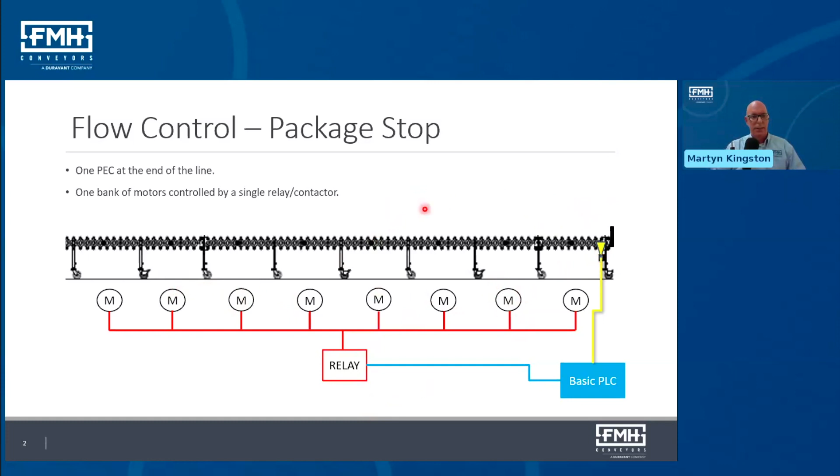We have a very simple setup. We have a very basic PLC, we commonly use a Siemens Logo. We have some sort of sensor at the end, and one relay or motor contactor just to turn all the motors on and off, and they all turn on and off at the same time. Obviously you can get issues with inrush current, that sort of thing, turning all those motors on and off. That's one of the disadvantages, but this is a very simple flow control.

So our packages will come trundling down the flex. When the first package hits the sensor, there's a small time delay normally between hitting the sensor and the motors turning off, but we essentially turn all the motors off at the same time. If somebody's there, they take the package off and the motors can restart. That's pretty much it - that happens over and over again until the conveyor is empty.

We're normally building a time delay on the relay that prevents chatter on the contactors. So we have a small time delay for stopping and a small time delay for restarting. This also allows you, if you have a queue of boxes along here, to get that box off without another 50 boxes trying to push you over - so you take away that line pressure.

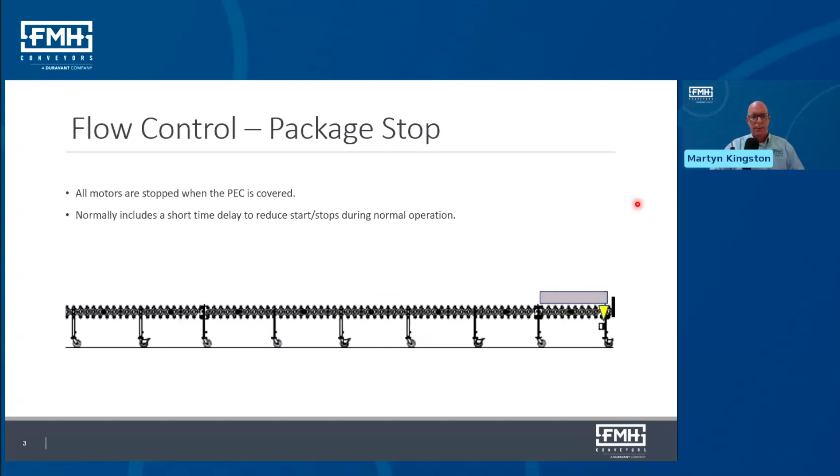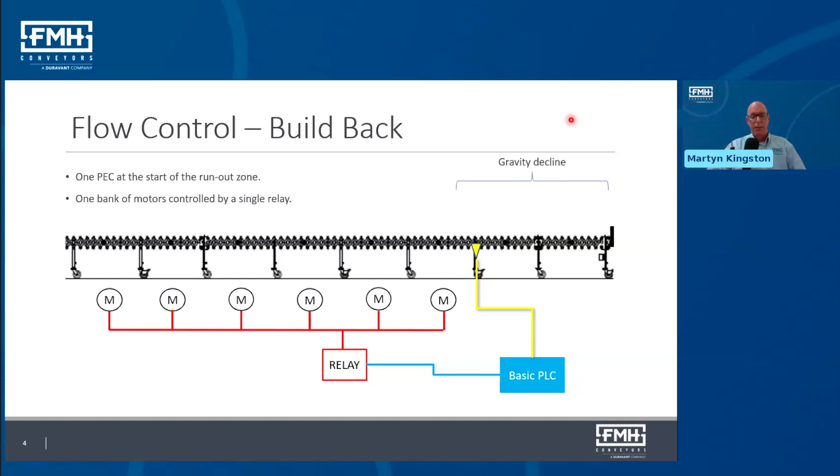So next we have what we call build back. I've actually drawn a gravity decline - I'm using the same drawing, but use your imagination that this is running downhill. So we have the same kind of setup as we do with a package stop - only one sensor, one relay, one basic PLC. But now the photocell is back from the end a little bit.

So what we can see here is the package building up, and eventually that photocell is covered. Again, we're building in a time delay - I don't want it stopping every time a box passes over it, so we have to build in a time delay based on speed. Also we need to make sure - this is a common error - the photocell must be in the gravity decline part. Otherwise the system won't restart by itself, and after that time delay, the motors stop.

But if you don't put the sensor in the right place, when you get that restart, it won't become uncovered, so it has to go in the gravity decline. When that restart happens, the motors start up again and it all carries on. Because you've got that time delay in there, if you've got someone there constantly emptying that section, then the motors don't stop at all.

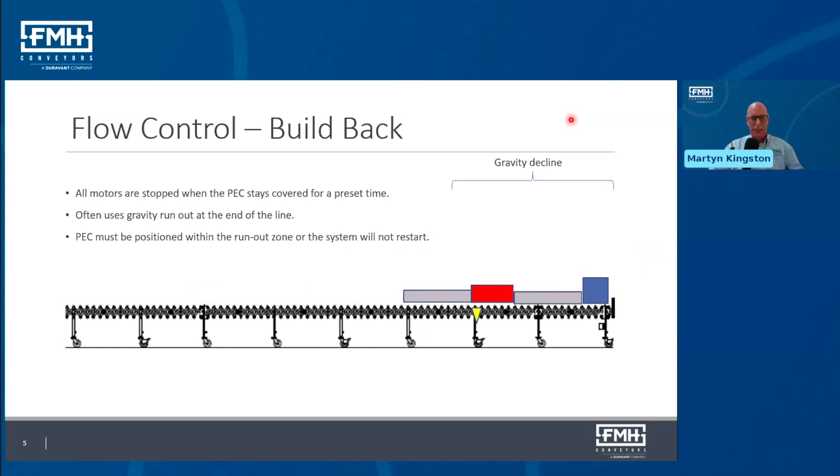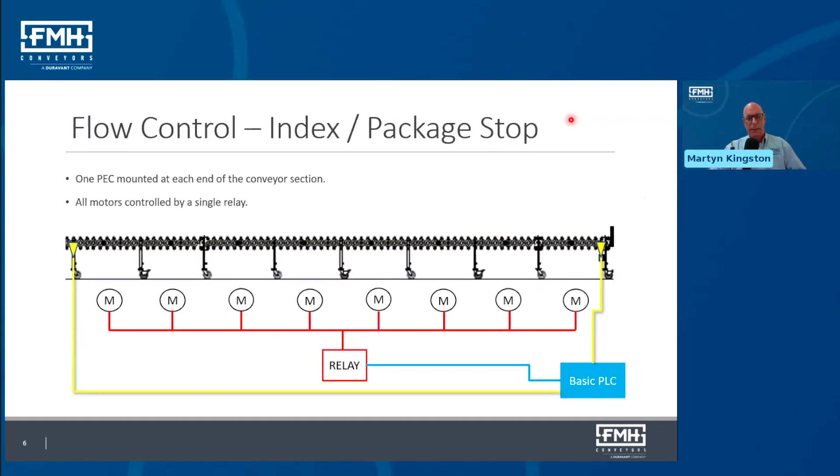So indexing - this is getting a little more interesting, and the applications are a little more interesting. Now we have two sensors, one at each end of the conveyor. All the motors are controlled by one relay, all starting and stopping at the same time, so the same negatives that you might have there.

Indexing is when the start sensor initiates the motors to move. So when it's in index mode, all the motors are off. The first box comes in and starts the motors off, and when it sees the tail end of the box, the motors then stop. One of the advantages here is you get a constant gap between parcels independent of the parcel size. So what you get is what I'd refer to as a maximum fill rate - if you've got two small parcels and one big parcel, you're getting the most amount of parcels onto your conveyor at one time.

So when we switch to a package stop mode, all the parcels move to the end sensor, and then we can start removing them. Let me back up a bit.

Just to say, when both of those sensors are full, then we get a full signal. Now that can be a light or a flashing button or an audible alarm, but it will show that the whole thing is full. It could also be an output to a system, SCADA system or something like that.

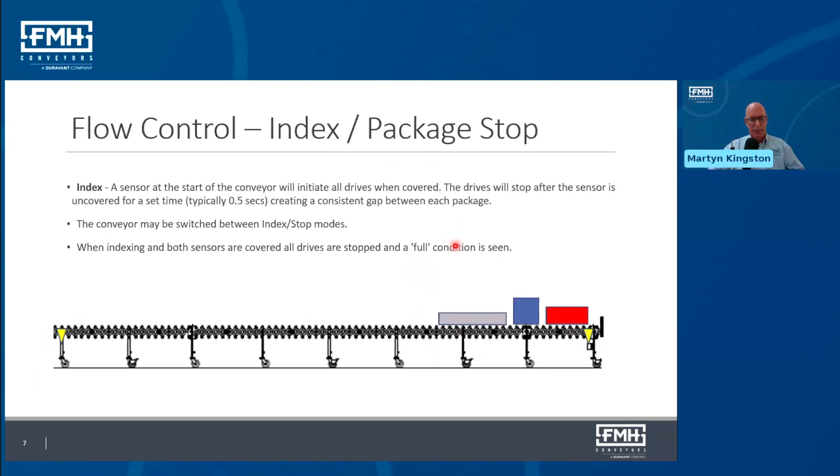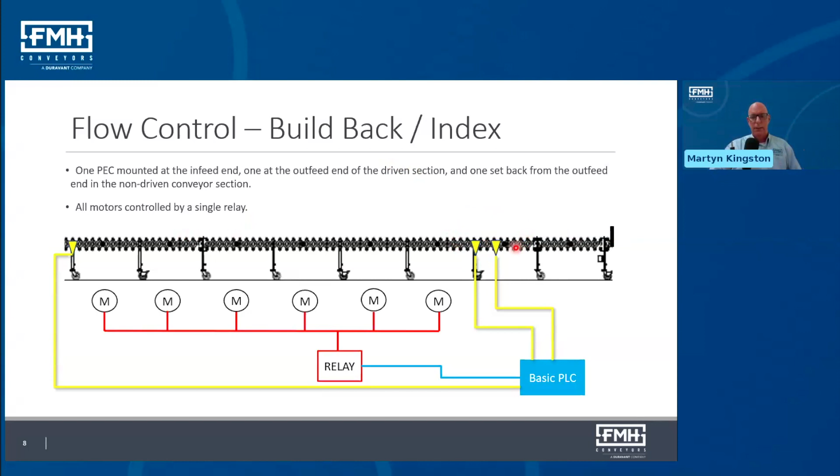So now we're combining two different systems that we've talked about already. We have 3 photocells. We have the indexing system, which we've just seen, and that's combined with a build-back sensor. So essentially, we don't do anything until that build-back sensor is activated.

We're just in normal running mode. So all the parcels will run down, conveyors running normally. Now, when that last section is full, nobody's there to empty it, or there's some sort of build back there, then we tell the rest of the conveyor to switch into index mode, start accumulating. There's nobody here to take the parcels off.

So that's when we start to index. So then we can fill up that whole indexing section while this guy is on a break, or sorting out some parcels in the truck, or he's dropped a box of wine or something. So, whatever that problem is.

As soon as that's taken off, the build-back sensor becomes uncovered, and it automatically switches from index mode, and all the parcels move down as normal again.

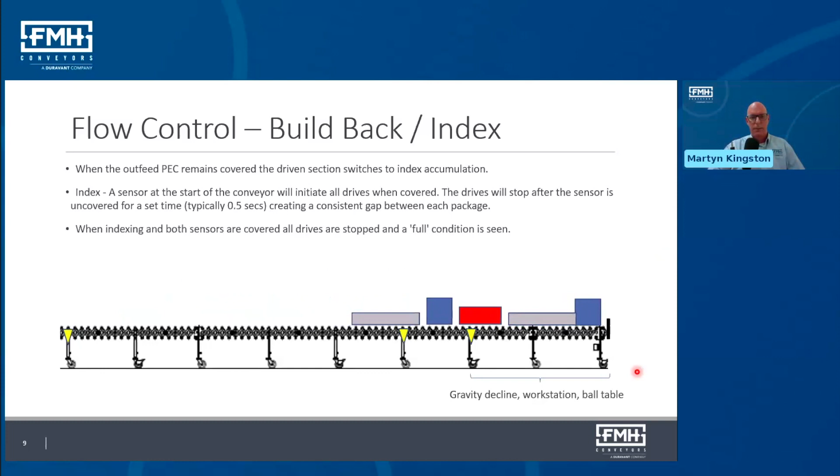So we're expanding on that same idea, but we're adding indexing sections. We're kind of splitting a longer conveyor into zones. So we have a number of index zones, each controlled by a separate relay. And the trigger to tell these zones to index is that build-back zone.

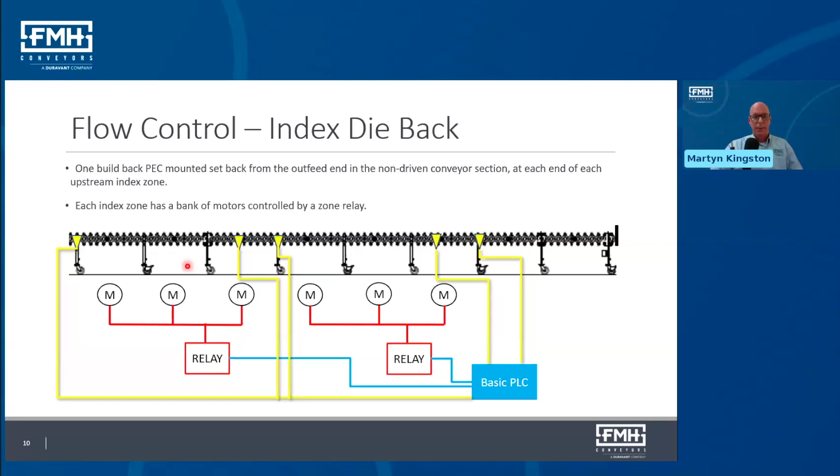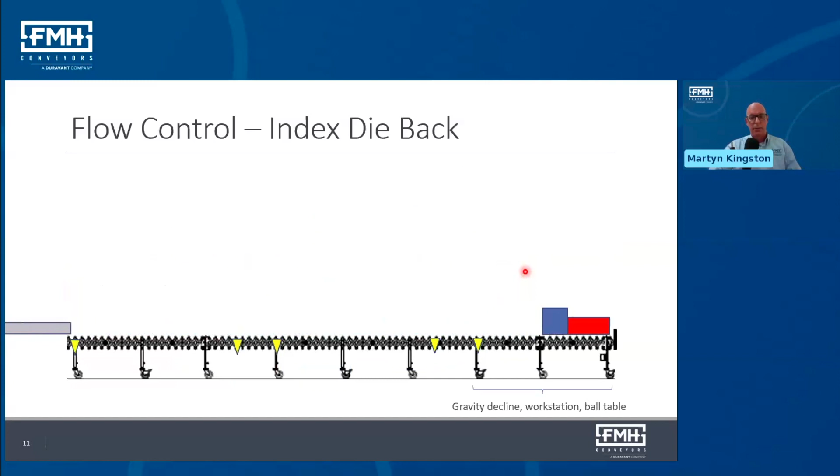We've done systems of this where we have an operation at the end of a long conveyor line, something like a weigh scale or a packing line or a scan. And if that person can't keep up with the flow, if it's normal, the input and the output are balanced, then the conveyor just runs as normal, no start stops, none of the disadvantages that come with that.

When it fills up and the person can't keep up with their work, or they've met a problem, or they've had to leave, then the immediate zone upstream starts to go into index mode. And then we start to fill up.

Now, the rest of the zones, however many there are, they're all just running normally. They're not starting and stopping. It's only this one. When this one's full, i.e. both of the sensors are covered, then this next zone upstream starts to accumulate.

And as soon as this zone becomes uncovered, then everything goes back into normal running mode. We don't need to accumulate anymore. The problem's gone away. The person's back at their station.

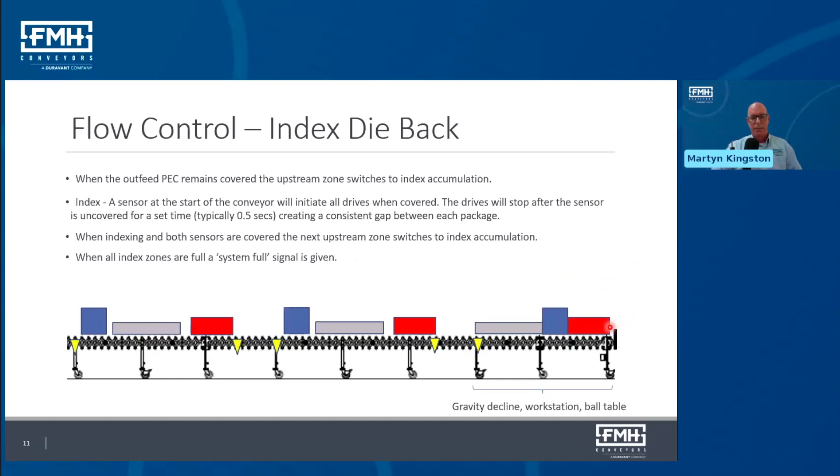Next up, we've got increasing complexity all the way through. You can see now we've got multiple relays, multiple motors. We've got one central PLC. That's normally the architecture we see on a flex.

Obviously, there are other things we can do on fixed conveyor. There's 24-volt technology where we use separate control cards with separate 24-volt motors. You might end up with one card controlling 2 or 4 zones, but in this case, we're using our normal DC motors and they've got an onboard relay.

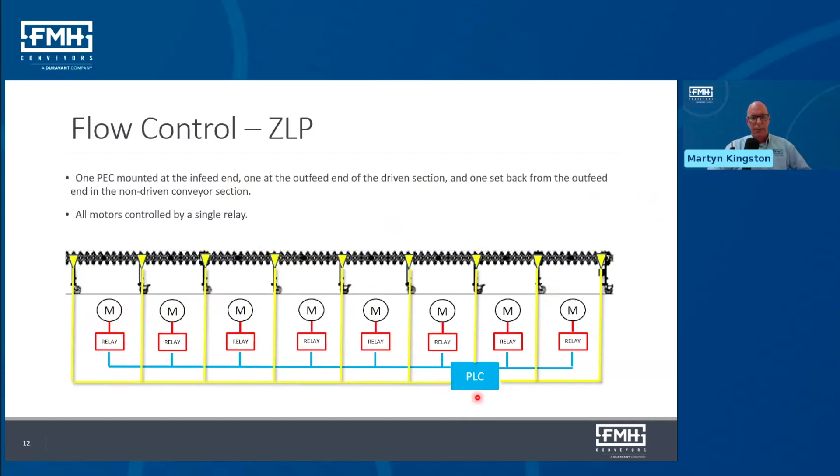So the PLC receives all the information from the photocells and then tells the relays when to turn on and off. Normally, we're stepping up from a Siemens logo here up to something a bit more substantial, probably a 1200 series PLC.

So singulation release. This is always one that's difficult to explain. The difference between singulation and train release. I'll have to admit, I've been at this for about 30 years, trying to explain this one from the early days when I worked with Interroll and we were developing the 24-volt technology. There were 2 versions of release, and trying to explain the differences is a difficult thing. Hence the animation. Hopefully, this will make it easier.

Essentially, what you get is the parcel runs through, it stops at the sensor with the leading edge. The system doesn't care about the size of the parcel as long as it's not bigger than the zone. Otherwise, you'll be covering both sensors and you end up with a stop situation that can't be released.

In this case, with singulation release, the first parcel is taken off, and then each parcel shuffles down. Essentially, each zone only looks forward to the zone in front. It can't see any further than that.

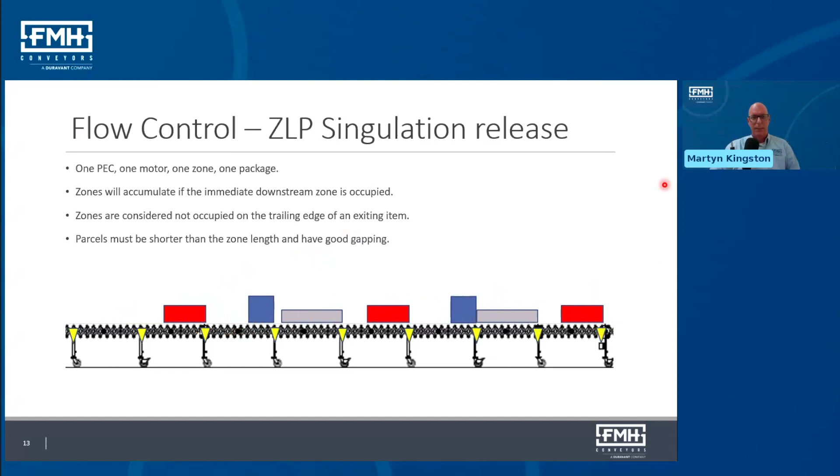If we look at train release, it starts off the same, it's got the same architecture, the same parts, but the release is different. The restart is different. So in this case, when that first parcel is taken off, everything moves together. Hence the name train. Everything moves just like a train does.

Now, the disadvantage of this one, you do get a big inrush current again because you're turning all your motors on and off at the same time. So that could be an issue. And inertia. You can see here that it's a flex on wheels. If you don't have all the brakes on and you've got a lot of inertia on top of the conveyor, it could be that when you get that big restart, the conveyor goes one way and the parcels go the other way.

That can also be an issue on fixed conveyors where the legs start to flex because of the inertia at restart. So sometimes you do train release and then break the zones up a little bit, or you build in some sort of time delay on the motors so that you don't get all the motors starting at once.

It's worth noting, if we're talking about throughput, the train release is twice the speed of singulation release. So all of them are sort of dependent on the size of the parcel, the size of the zone. It's not really conveyor speed that makes the difference, it's the speed at which they're moving downstream. And train release is twice the speed of singulation release.

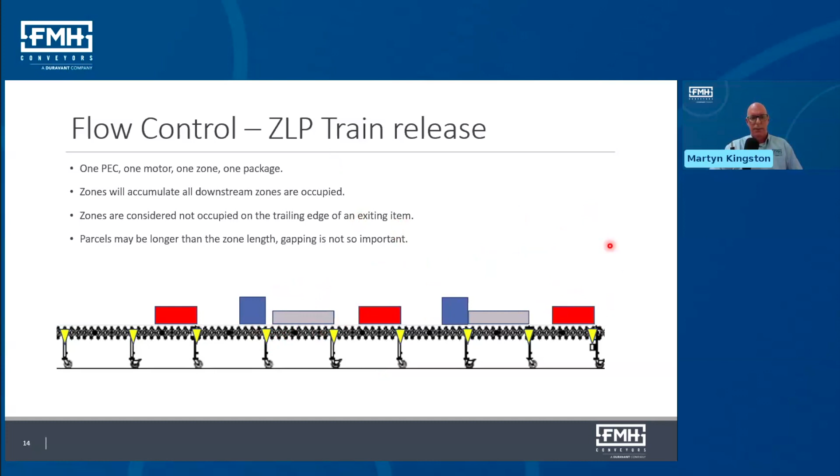So next thing, very simple this time. We've got one sensor. We're talking about jam detection. Typically, it's at jam points, around merges, anywhere you've got a 90-degree, slides, those sorts of things, you would get a jam detection. We don't commonly use it on a flex, but it is possible.

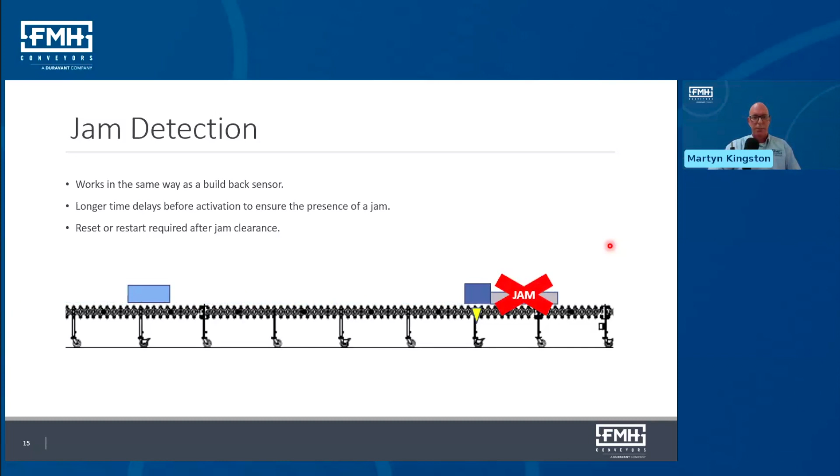So a parcel gets jammed, maybe it's jammed between side guides, it's too big, something's happened, a piece of strapping on it or something. Then the next parcel comes into the jammed one and the sensor stays covered.

Normally, we're looking at a much longer time than you would see on something like a build-back sensor. We've done projects in the past where it's anywhere between 10 seconds and 45 seconds. Obviously, the 45 seconds, that's fairly long, that's a long time to see whatever damage might be caused by that jam. So you have to kind of balance it between not stopping too often and the damage that may be caused.

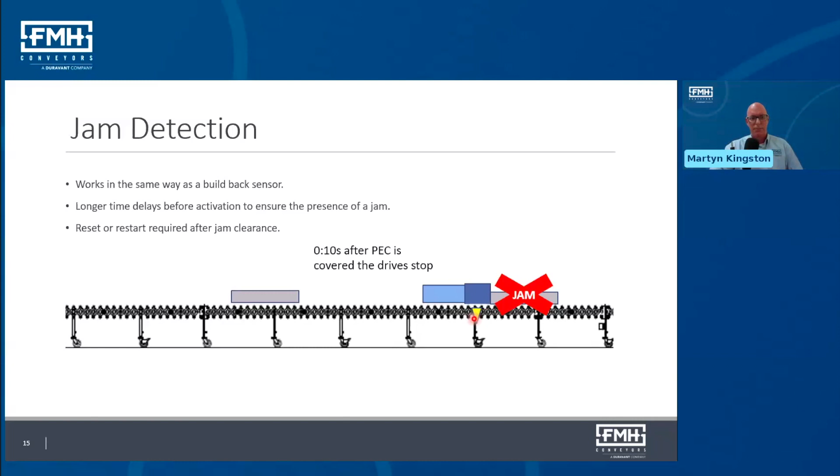Normally, we clear the jam and then hit a reset button, and that kind of restarts everything.

One last part, obviously we saw a lot of sensors in the presentation so far. We have to match the sensor to the application and to the product. The material to be handled for us is normally cartons and poly bags, that sort of thing, so it's fairly straightforward. But we also do things like tires, plastic molded parts, it could be anything. And you really do have to pick the sensor for the right application.

The most common one for us is to use just a diffuse scan sensor, which is in a bar looking up through the rollers. Diffuse scan sensors are okay, they're pretty good. The range can vary depending on lighting conditions, that can cause some problems, but for the most part it will see the box and everything will work fine. Because we're looking up through the rollers, what we can do here is have an oversized box, so the box can be bigger than the conveyor and hang over the edges.

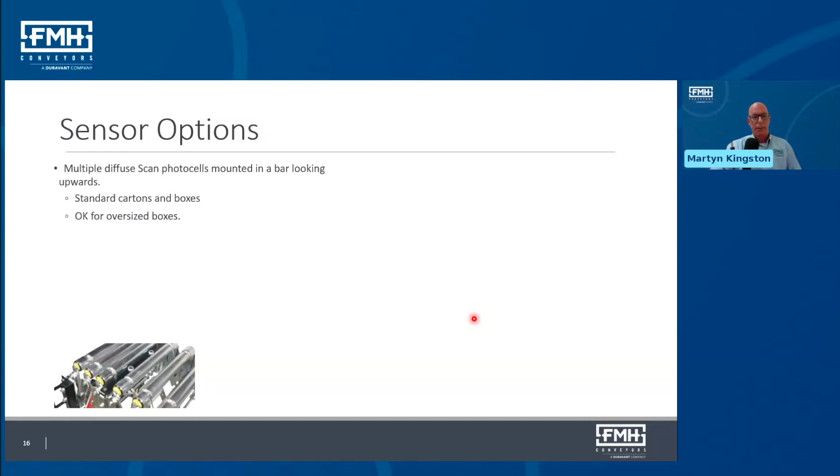So that can't be done on our next option. If we have a retroreflective sensor, so we have a sensor and a reflector, we're now breaking a beam, so you're much more likely to get a good positive signal. But now we have parts, the reflector on one side, the sensor on the other side. Now we have parts that are sticking up above the top of the roller, so the sensor position has to be wider than the biggest box, and you can't put anything wider than that. So you're creating an obstruction.

Next level up, we'll have a through beam sensor. So we have a little story from the past. We had a customer using retroreflective sensors, which was fine until they started putting a silver label on their product, and the silver label acted as a reflector. So we were getting all sorts of weird signals, and we had to go and change all of the sensors to through beam. So it really is, you've got to be careful about the application.

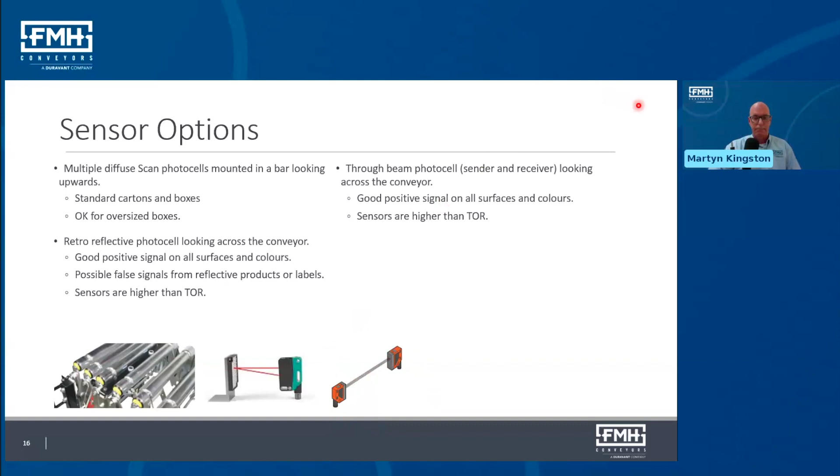Here we get a good positive signal again. One of the points about a through beam sensor is we can now be safety rated. There's a lot of changes at the moment around EN 619 and safety rating, performance level rating. This type of sensor can be rated at performance level C. You can't really go much above that with an optical sensor, but a through beam sensor can do that.

Then we're looking at arrays and light curtains. Array sensors are fantastic for irregular parcels. If you've got a box, this is probably overkill. If you're putting all sorts of parcels down, garden spades for instance, we have actually seen that happening. A garden spade, obviously, you've got a change in profile, it's a change in height. Sometimes it's on the belt, sometimes it's sitting 3 inches above the belt.

The array sensor is actually several sensors stacked one on top of the other, so you end up with a larger range of vision. You can also set array sensors so that it can ignore some products, a belt, for instance. If a belt is moving through that array, you can tell it to ignore anything that's only covering one of the lenses, that you need a 2-lens cover to take the signal. So that's quite a useful thing. Obviously, they're more expensive - you've got multiple sensors in one stack.

And if you're doing safety devices, obviously something like a light curtain is required for any higher performance levels.

If optical sensors aren't going to work for you - things like tires - we did one project in the past where we had plastic molded fuel tanks, which were black. They had multiple different textures on them. They were a very weird shape. In that case, ultrasonic sensors are fantastic.

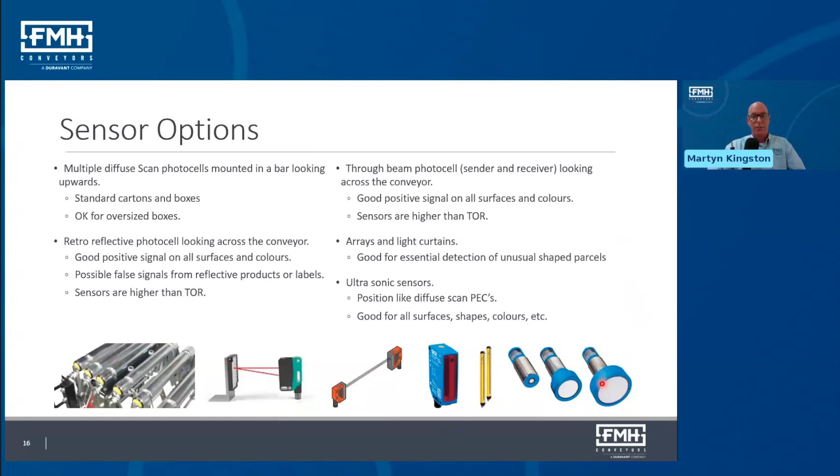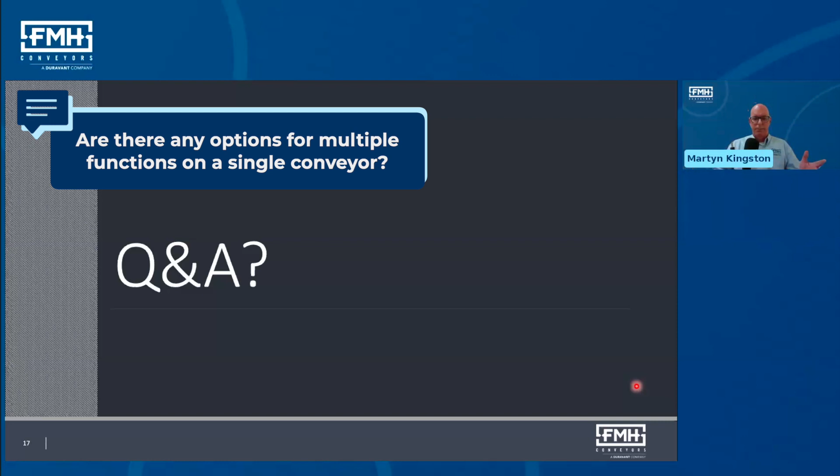So are there any options for multiple functions on a single conveyor? Yes. We launched this a year and a half ago, I think it was. So we can have a flexible conveyor with all of the functions on. It's built like a ZLP - we have all the sensors of a ZLP because that's the higher level. But you can have a selector switch that turns ZLP off if that's not suitable for the application you're doing. So you can have zero line pressure for part of the day if you need it singulating parcels, and then use it for another application another part of the day. You change the operation and now put piles of parcels on, or longer parcels that ZLP wouldn't work with. You can just have this 5-position selector switch, and that gives you an option to do anything you like for any application. So yes, that is possible within our products.

So if the conveyor has ZLP, but the operator manually moves between zones, what happens to the logic? So that's really good.

ZLP doesn't have the visibility that a human does, obviously. So if you remove a parcel, it just knows that the sensors are covered. There'll probably be some sort of time delay, and then the system will try and reset itself and everything will move forwards.

Problem happens really when you have, not with train release, but mainly with singulation release, a large parcel covering two sensors - then the system can't restart because you've got 2 zones covered. The previous one can't move forward because the zone in front's covered, and both zones will end up in a stationary condition, and it can't clear unless you have a manual intervention.

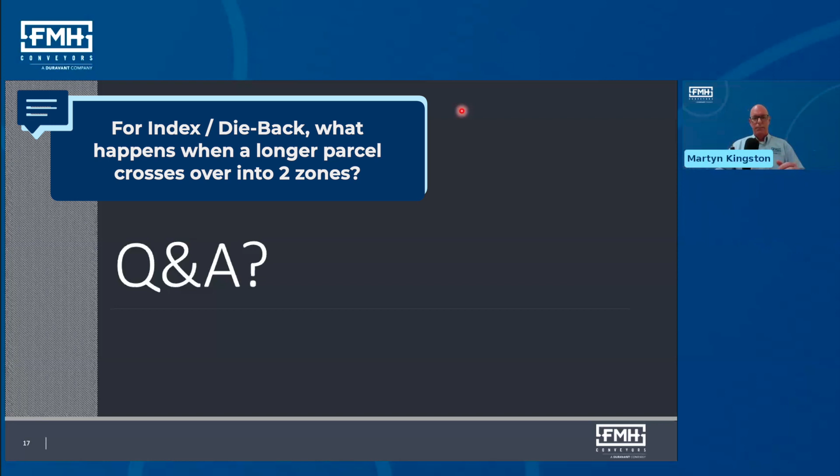So for index dieback, what happens when a longer parcel crosses over? The longer parcel for index dieback will just be seen as a series of long parcels - it could even come as a slug of parcels. But again, it only sees sensors on, sensors off. So a long parcel covering 2 sensors in a single zone will immediately trigger the upstream to start accumulating.

How does flow control make the conveyor more efficient? In a normal conveyor, that's exactly what flow control is about. In a normal conveyor, it just runs - the motors are running whether there's a parcel on it or not.

What we can build in is sleep modes. So if there are no parcels, no activity, we turn the motors off. You don't use electricity, you don't wear out the parts in the motor. So that is a really key part of flow control - you extend the life of your product.

You pay less for your electricity. We're saving the planet, one sensor at a time. That's quite a good thing to do. Yeah, I think that's probably one of the main reasons for doing that.

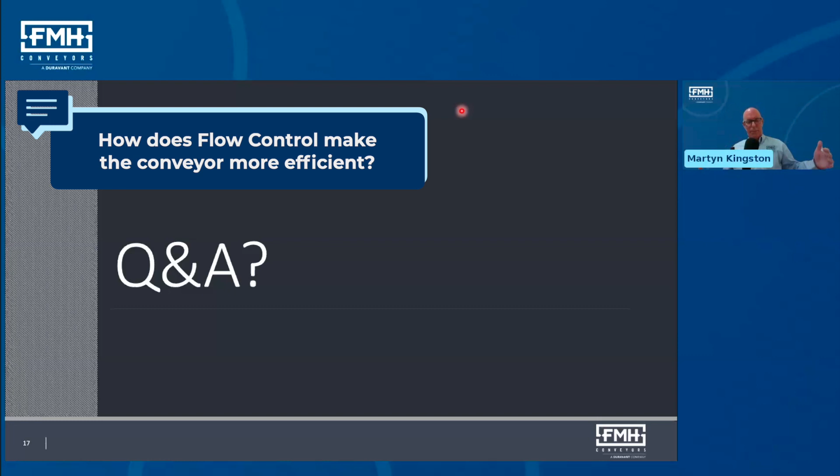Obviously, it's better for usage as well. If you've got nice flow control, you're not just getting parcels falling off all over the floor. Each parcel's presented one at a time. It's a much safer way to work.

So how many sensors are on a standard sensor bar? That really depends on width. Within our Flex product, if we have the diffuse scan sensor looking up, we normally base it on what we might see on a typical material to be handled. If it's a normal 300 wide box, we would put maybe 3 on a narrow conveyor up to 5 on a wider conveyor, something like that. But they're pretty low cost, so the cost impact is minimal.

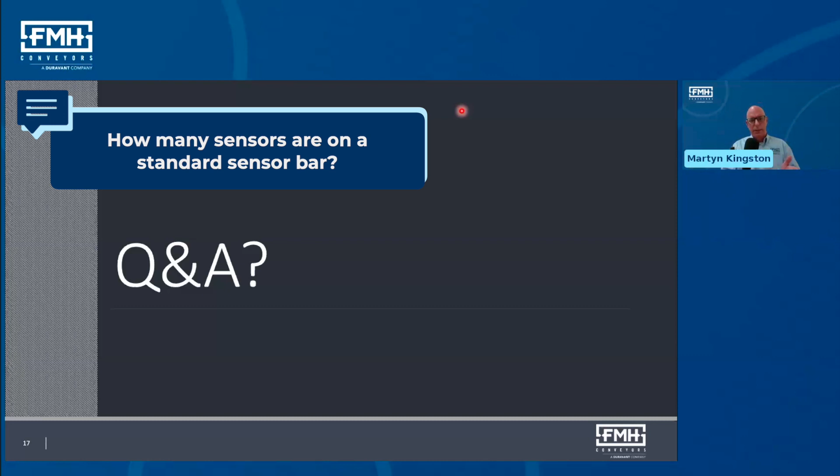If you are handling smaller parcels, or not necessarily smaller, but less width, we can increase the array of sensors. We can close that pitch up on smaller widths, we can add more sensors in.

Any health and safety implications with ultrasonic sensors? I'm not aware of any because they're ultrasonic. Unless you have like dog hearing, it probably shouldn't be an issue. But I'm not aware of any, no.

And can we connect with existing conveyors on site? Absolutely, yes. So quite common is to have some sort of machine plug, so we share our signals with other conveyors and vice versa. We have shared emergency stop zones. But yeah, it's pretty common, certainly for flex conveyors.

It's kind of standard practice now that we have an interface plug. Normally in a project that's agreed up front, we know what the interface is going to be and what the pin allocation is, since we're going to share with someone else. So we've got 2 controls engineers who make that agreement, and yeah, everything normally works fine.

I think that's all the questions all done now. So we're 1 minute over. How's that for timing? That's not bad at all.